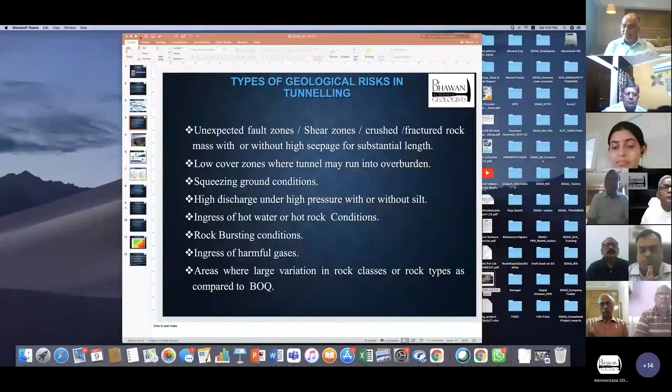He needs no introduction. He is an engineering geologist par excellence and formerly Executive Director NHPC and CMD MECL. Then we have Mr. Sunil Jain with us. He is the Additional General Manager, Rail Vikas Nigam Limited (RVNL), and is currently involved with the development of the Rishikesh Karnaprayag rail link.

We are lucky to have him because his contribution today will be, I think, on TBM bored tunnels. We have with us A.K. Mishra ji, the driving force behind hydropower in Bhutan, who is the MD, Mangde Chu, and we look forward to hearing what is going on in Bhutan, specifically at Mangde Chu.

And of course, last but not least, our stalwart hydropower engineer par excellence, R.N. Mishra ji, who has been the driving force behind UJVN as CMD, and he's a very busy person doing a number of things these days.

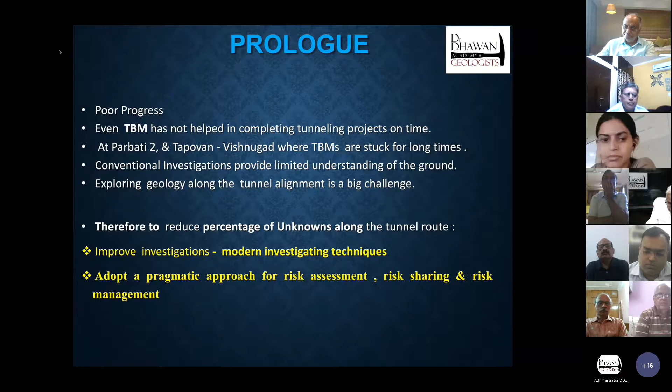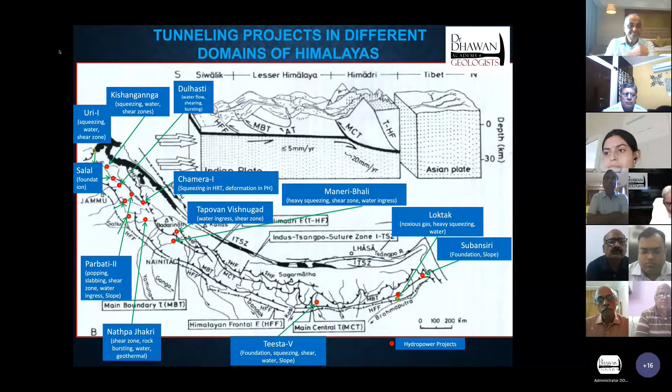So after having done hundreds of kilometers of tunneling, why do we say we are not satisfied with our own progress? The reason is that during construction of these projects, we experienced several types of problems. Some of the main problems we normally encounter are fault zones, shear zones, crushed or fractured rock masses, with or without high seepage over substantial lengths of tunnel, and low cover zones.

I had worked on 2 projects where we received very difficult situations because of that: Devi Ghat in Nepal, Loktak in Manipur, and in the Seva project. Mr. Mishra is here, he was the GM there. Due to low cover reaches, we had our projects really suffering.

Then squeezing ground conditions, we had it at Loktak, high discharge under high pressure with silt was there in Parbati 2. The project was closed for about 5 long years. Then there was ingress of hot waters in Nathpa Jhakri.

Rock bursting conditions, partially we received, we have seen in Parbati 2 ingress of harmful gases. Once again, methane was there in Loktak, and there were a couple of methane blasts, and a lot of people, maybe 100 people, lost their life. This was somewhere in the middle of the 70s.

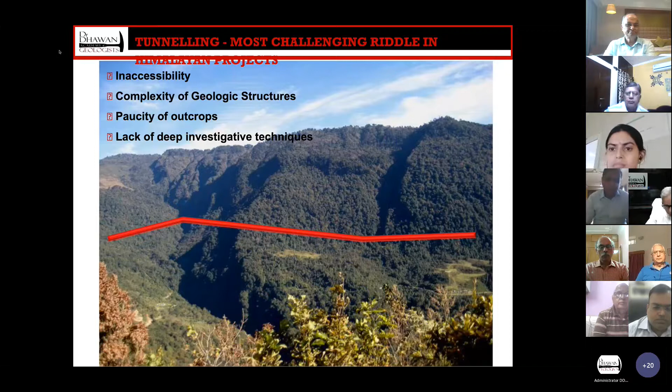So now you can imagine that if you investigate a tunnel in this area, how much geology you can understand with the help of only geological mapping or by making a geological section. So we have to look for the answer that this handicap in understanding geology is removed with the help of other complementary techniques.

And many times for a project like Chamkarchu, we try to develop a geological model. Nowadays the term model is a buzzword. But this is a geological section, you can say a 2-dimensional model. You may take this picture as a hypothetical picture, where based on geological mapping, let me say what we can achieve and then what we cannot achieve.

We now know what are the types of geological formations through which our tunnel will go. And this can be done with a lot of accuracy if the person who has mapped the area has done good work, and he has tried to pick up all kinds of outcrops, although in the Himalayas there are situations where we do not get more than 2% outcrops in the area.

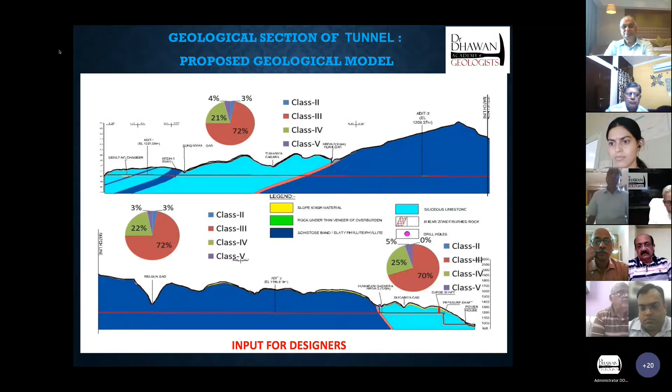And then we also know what are the probable contact zones. We also know some idea about the rock class percentages. But to me, this is a kind of hypothesis which we have to prove or disprove through investigative techniques.

I'm not going into the details of those techniques, but I will simply draw your attention that after doing mapping, we can divide the tunnel into three types of areas. One, where geology is reasonably well known. In my opinion, if the geological mapping is good, you can go up to 1/3 of the tunnel being well known.

Then we have areas where geology is known, but the location of problems is unknown. And the third sector of the tunnel would be where nothing is known. We will be in a dark zone, and we will know some broad geology, outlines of geology, formations of geology, what type of rock types will be there, but neither the locations of problems would be known, nor the extent of geological formations can be understood with clarity.

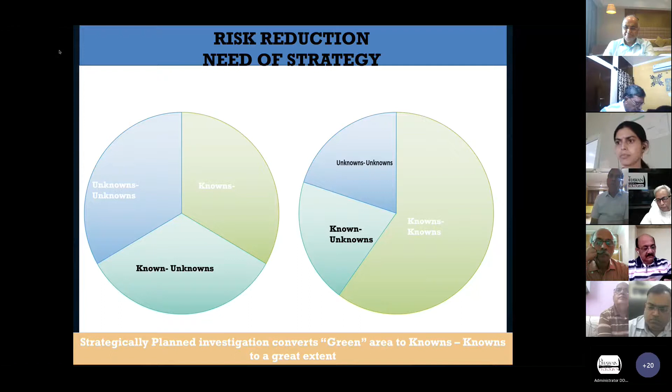So now there's a need for a strategy of risk reduction. If the investigations are done properly, if we can focus on the geological studies for identifying major risks, we should highlight the terrain limitations which have influenced our investigations.

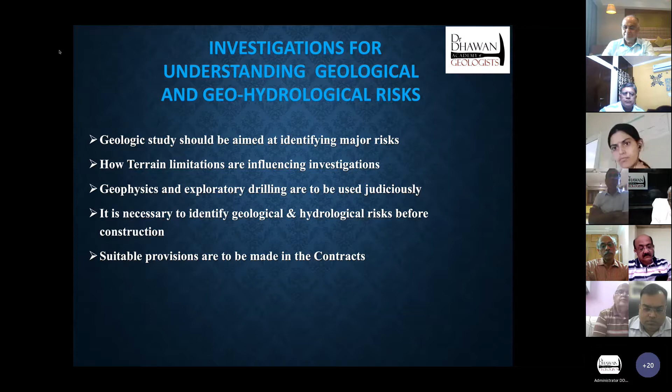We have used geophysics and exploratory drilling with some judiciousness. And if we have identified the geological and hydrological risks before construction, and we have made suitable provisions in the contract, I am sure we will do a better job of identification of risks, their assessment, and then we can draw a management plan.

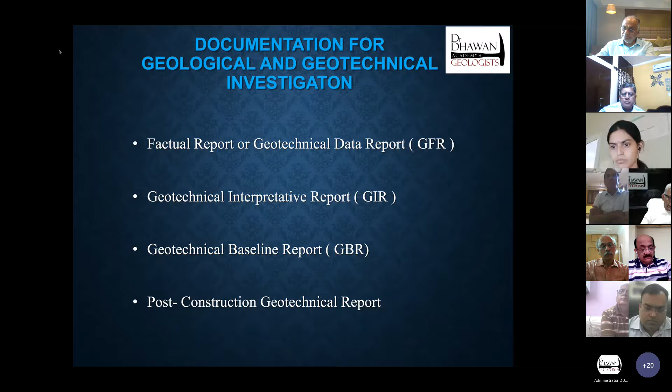So nowadays, previously we were submitting a document known as DPR, but now it is insisted that there should be one volume recording only the factual report of geotechnical data, which is the GFR, so that anybody can interpret your data and is not guided or misguided by your own interpretation. Interpretations are compiled in the second volume, which is the GIR, and then GBR, the Geotechnical Baseline Report.

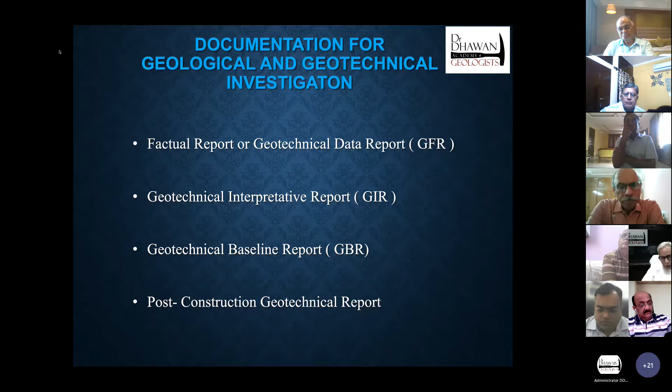In my opinion, this is the report in which all geological and geotechnical risks should be spelled out. But still there will be certain limitations. We will not know the exact locations.

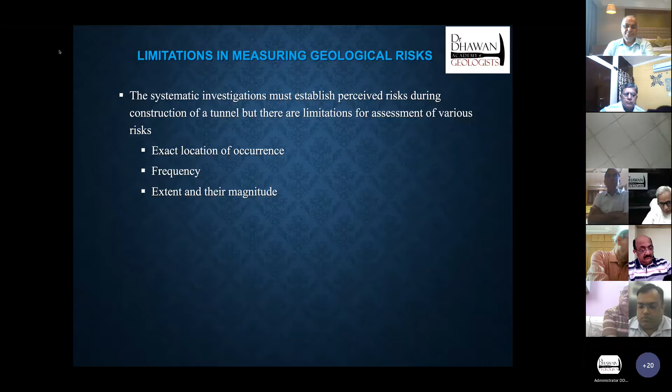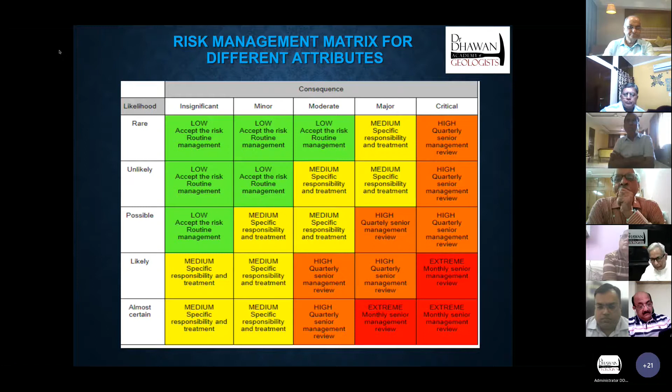We will not know the frequency at which a problem occurs, and we will not know the extent and magnitude in all cases, but in some cases we will. If you have a good set of geological data for each risk, you can prepare a risk matrix depending upon likelihood and consequences into four colors: low, medium, high, and extreme. Finally, record enough geological and geotechnical studies for the GBR, identify each adverse geological occurrence, make a plan for every adverse geological situation, include possible solutions in the contract for tackling each risk, and maintain a risk register. I leave it here.

Here onwards, Mr. Sumit Jain will take over, and he will give you a much better idea about the risk register in his talk. Thank you very much, Deva.

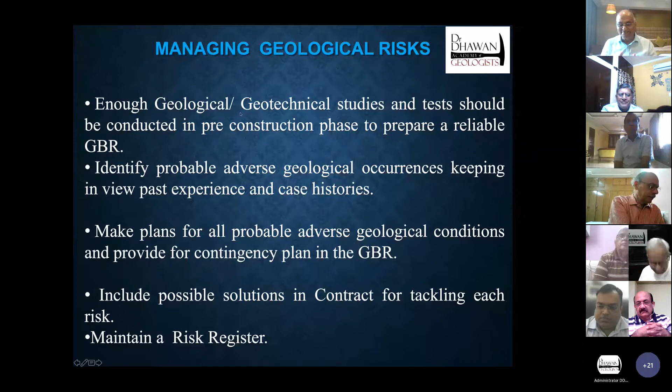Back to you. Thank you, Dhawan Saab. Thank you very much. It was the crispiest presentation we have ever had from you, and very informative too. And now let us welcome Mr. Jain. Jain sir, please.

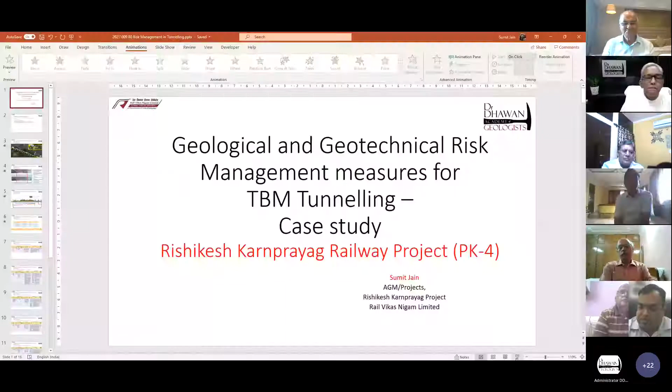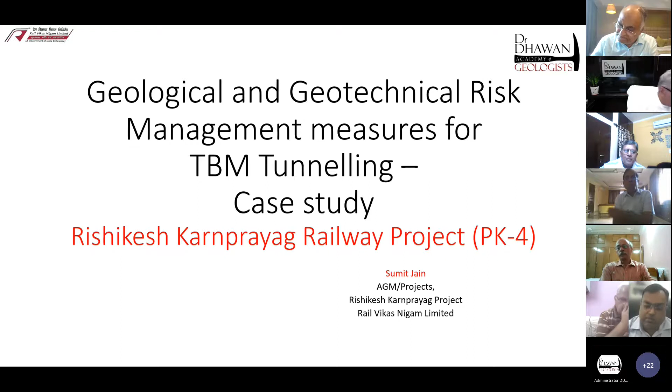Okay, thank you, DDAG, and I feel privileged to be present among you and to present a small aspect on the case study of package 4 in the Rishikesh Karnprayag project. Here we are focusing on the geological and geotechnical risk management which we had adopted in our project. The contents of the presentation will include a brief layout of what package 4 is, so we can get a better understanding.

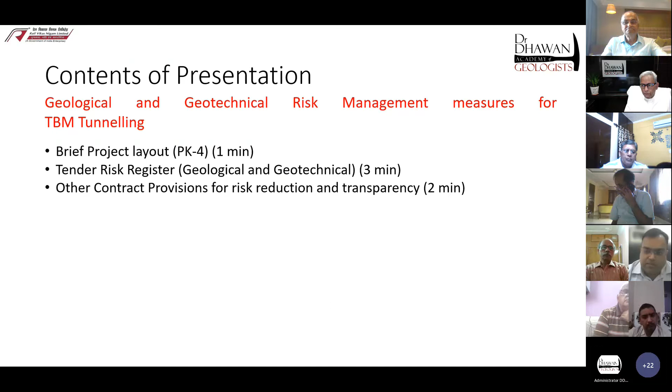Then I will be covering the tender risk register which we have followed in our contract, and within that register we are only going to cover the geological and geotechnical aspects. I'll also cover a few contract provisions kept in the contract for further reducing risk from the TBM operation point of view, and to promote transparency of work. The basics have already been discussed very well by Dr. Dhawan, and I will take it further to cover the risk register of our TBM project.

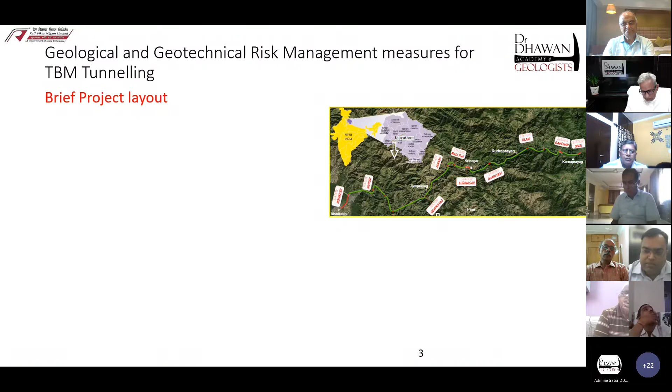So this is a brief layout. On your right, you can see a map of India and Uttarakhand, and the alignment of the project in green. You can see various stations, I feel they are visible. This is the package 4 location, which has been zoomed in, and this is the alignment of the railway project. I'll just go and switch on the marker.

So this is the Devprayag junction, where the confluence of the Bhagirathi and Alaknanda rivers is happening. Towards the right it goes to the Tehri Dam, and towards the Alaknanda it goes all the way up to Badrinath. This is where we are crossing this terrain at Devprayag. This is the Pauri district, and this is the alignment of the project.

This is the portion marked in blue, which we are going to excavate through a TBM. The length is 10.4 kilometers. It is a twin tube project, so we have 2 TBMs, with a 9.1 meter excavation diameter for each. We have a TBM breakthrough point midway inside the tunnel, so the remaining part is drill and blast.

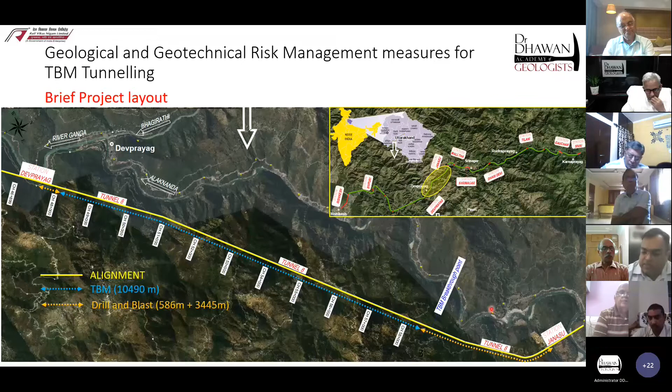So the TBM is going to launch from this location after doing a drill and blast of roughly 586 meters, and then we are going to do TBM tunneling all the way up to this breakthrough point. From the other side, we are going to drill and blast for 3.5 kilometers. We also have a shaft somewhere in between here, which I will discuss.

Now, briefly coming to certain aspects involved with the pre-construction, I would say pre-tender. This was the alignment selection for this particular length of the project. Initially, in the upper part of the presentation, this was the original alignment for package 4, including an underground station approximately 1 kilometer long, with a span ranging around 25 meters wide. This alignment was chosen because the area is entirely composed of phyllites of varying degrees of metamorphism, and we were thinking that if we go deep inside where the overburden is huge, we could face a very heavy squeezing condition.

That is why in yellow you can also see the adits which were located before the design stage. Then when we went to the field and did some geotech investigations, we found that this area is absolutely unfit for making the tunnel. It was primarily because the entire left bank of the Alaknanda River is a landslide-prone area, right from, I would say, if you know the locations here.

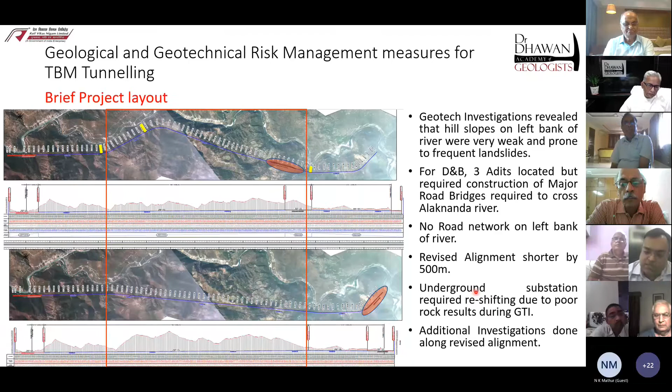So additional investigations were done along the revised alignment. This is the revised alignment in which this is the TBM section. We have a shaft, and this was Chandpur formation, entirely composed of phyllites, and the highest overburden is marked on your screen. We were starting from 544 meters, encountering a maximum overburden of 854 meters, and the minimum was in the range of 137, 70, and these numbers.

These were the initial investigations which we had done. The yellow arrows are spaced quite apart, especially in this zone, because there was absolutely no way to reach this area along the earlier alignment. When we shifted the alignment, we did additional boreholes and extrapolated the data of these boreholes to the new alignment.

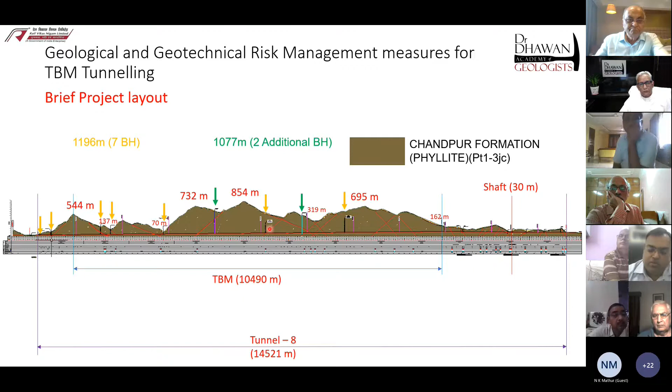The thing we were apprehensive about - that the rock would not be strong and we may encounter higher squeezing because of increased overburden - that was not correct. We got good rock formation in the entire length of this higher overburden area, and the UCS was coming in the range of 45 to 50 MPa. I would not put a single figure because there is a distribution in geotechnical test results. The most frequent UCS was around 45 MPa in this area, and that is when we took a decision to revise the alignment and go inside with higher overburden.

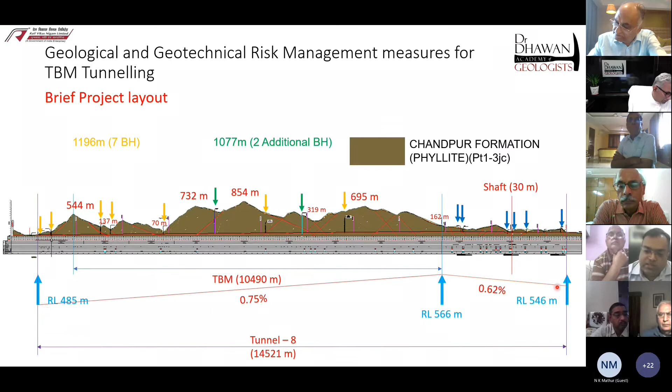Few more strategies to deal with risk for the TBM operation were to have a high point at the TBM breakthrough. So this was the TBM breakthrough area. We had a high point in the tunnel alignment, and any water ingress - although it is phyllite, the joints are watertight, we expect nothing to bother us really - but still for operational and construction reasons, we put a high point at the TBM breakthrough, and all water will come out by gravity flow. This helps reduce the risk of water ingress. On the other side, drill blast also has naturally gravity flow driven drainage.

Now coming to the tender risk register, we have this distribution. We are firstly classifying the likelihood of occurrence with this percentage distribution, then discussing the magnitude of consequence with this marking. Initial risk is high, medium, low, and residual risk is high, medium, low. Each project may have their own strategy to quantify and identify the occurrence parameters and the residual risk magnitude - it's very project specific. It's nothing to do with a standard guideline - yes, there are international guidelines available, but we followed our own set of definitions specific to our project.

This was the column or table headings of the risk register. We were firstly showing the event, which was described, then the impact or consequences, discussing the likelihood and the potential impact if it occurred, and the magnitude of consequence if it occurred.

Then we are discussing the initial risk, that if the occurrence of that event is there, then what is the risk to the project, and what are the mitigation measures required to be taken. Now these measures are both from the employer side and the contractor side, it is not only for the contractor. So here we made a distinction that we have to jointly address the risk mitigation measures.

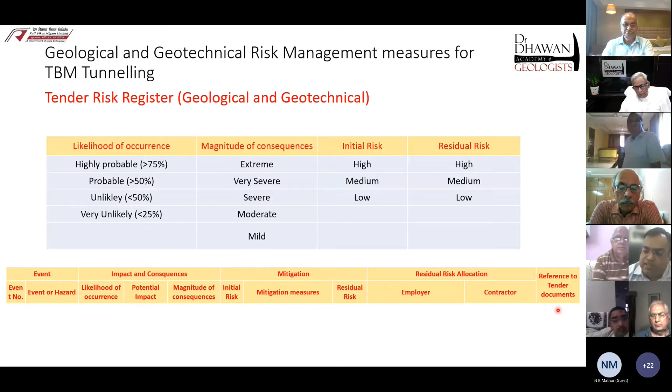And then in the last column, to make it contractually applicable, because in the contract there is a priority of documents, we are mentioning the clauses of general conditions of contract, or GCC if you say, or particular conditions of contract, so that we have an order of priority of these risk management measures.

So this is the very first event which was there in the risk register: variation in distribution of support sections. We are following both drill and blast and TBM. In case of NATM, we are following ONORM, and in ONORM there are various support section types. So we have given a distribution of the support section types along the length of the tunnel.

This is given in the GBR. Now that distribution may vary, because in ONORM usually it depends on a lot of things, not only the ground, but also the way the contractor is installing supports, or the way the grouting is done, and many other factors are affecting it. So we are mentioning that if there is a variation, then it has to be addressed.

And how it has to be addressed? The mitigation measures are like that: the contractor shall commit the progress rate. So supposing there is a B1, B2 or B3 distribution of support section, we have already asked the contractor to commit the progress rates in the contract. If B1 occurs, how much progress rate is he going to give us? If B2 is there, what is the advance rate? So these commitments we are already collecting during the contract when the bid is being submitted.

And this is taken against a standard or rather a detailed design GFC. So another important thing is that the construction drawings, which are normally issued after the award of contract to the contractor, should be very well detailed and included at the tender stage itself, when we are inviting the tender, so that the contractor actually knows what he's going to install, how he's going to manage the work and sequence his operations.

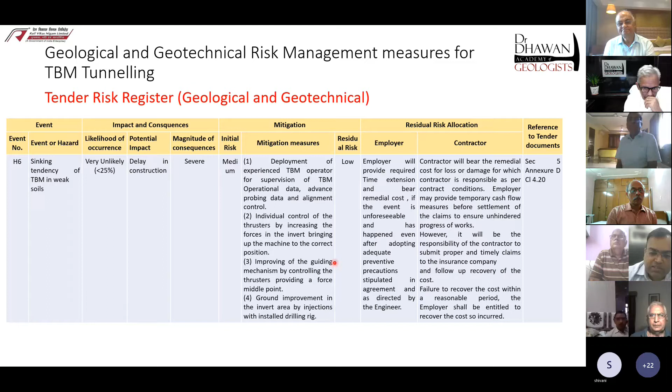The last event is the sinking tendency of the TBM in weak soils. This can be mitigated by deployment of an experienced TBM operator who supervises the operational data, advanced probing data and alignment control, individual control of thrusters by increasing forces in the invert, bringing the machine to the correct position, improving the guiding mechanisms, and ground improvements in the invert area by injection of grouts.

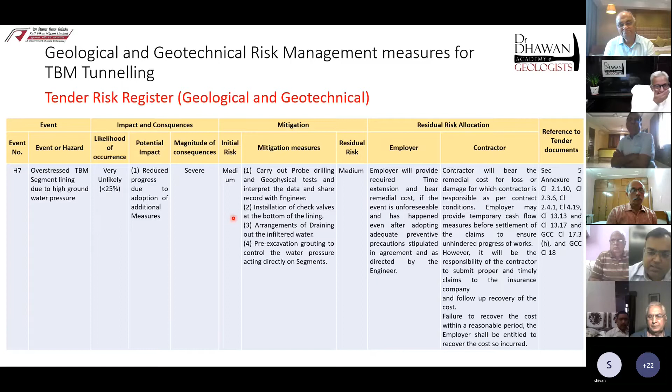Lastly is the overstressed TBM segment lining due to high groundwater pressure. This can be mitigated by carrying out probe drilling and geophysical tests and interpreting the data, installation of check valves at the bottom of the lining, arrangement of draining out infiltered water, and pre-excavation grouting to control the water pressure. So this covers briefly the geological and geotechnical aspects.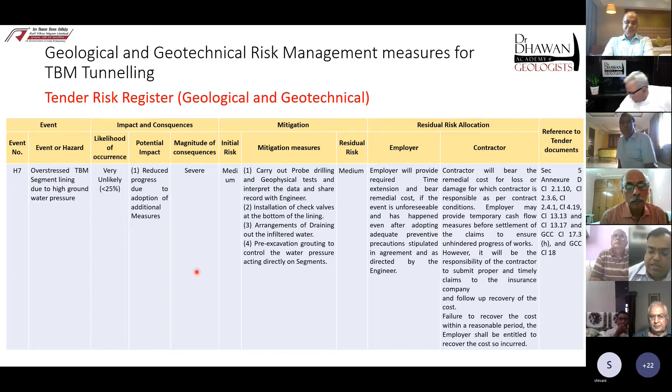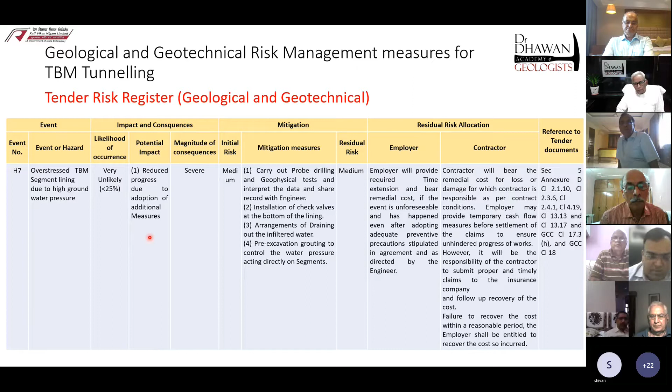In our contract, we have many other categories like TBM design and manufacturing stages, climatic, health, safety, and seismological risk. We also have availability of raw material identified as a risk, working in dumping grounds, transportation logistics, transport of segments, and transporting of the TBM to the site. TBM operation and maintenance is also identified as a risk with many events categorized. Segment casting and installation is a very big area where we have carried out certain risk mitigation measures.

Before going further, I'll cover one more thing regarding the TBM machine - a few contract provisions we have kept, done after a lot of study and review of what has been going on not only in India but around the world. After this I'll close my presentation, but before closing I'll give a brief glimpse of what we have done in the contract.

All boreholes have been investigated, and in situ and lab tests have been shared as GDR, which was covered by Dr. Dhawan. Baseline conditions for bidding were shared as GBR. The contractor has been told he is free to carry out any additional investigation on a payment basis if he feels so, and this has been given in writing, since we are doing this as a partner to the contractor. So tomorrow there should not be any hesitation in doing this investigation - we should not leave this stone unturned.

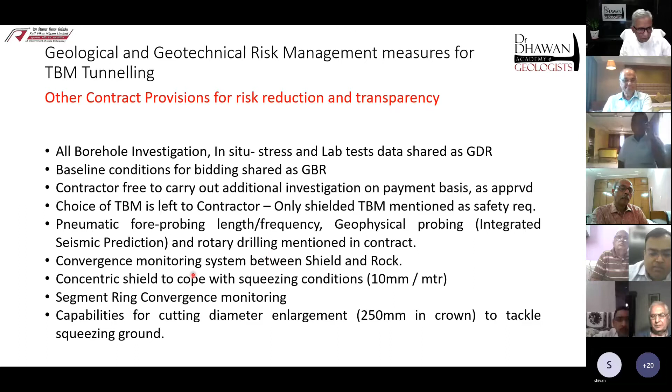Then the choice of TBM we have left to the contractor. We have only mentioned that it will be a shielded TBM because it is a safety requirement of tunneling standards. We have said there will be a pneumatic probing facility in the TBM, mentioned the frequency of probing in the contract, the geophysical probing requirement, the rotary core drilling limited to 1 meter, 2 meter, and the convergence monitoring system between the shield and the rock.

Concentric shields have been specified to cater to squeezing conditions, and the limit of conicity in the shield has been mentioned as 10 mm per meter. Each shield has a front shield, middle shield, and tail shield, so along this total length the conicity will be 10 mm per meter. The shield will actually diametrically reduce from the front shield to the tail shield, because the rock is squeezing towards the shield, so there should be inbuilt margins into the shield to avoid getting trapped.

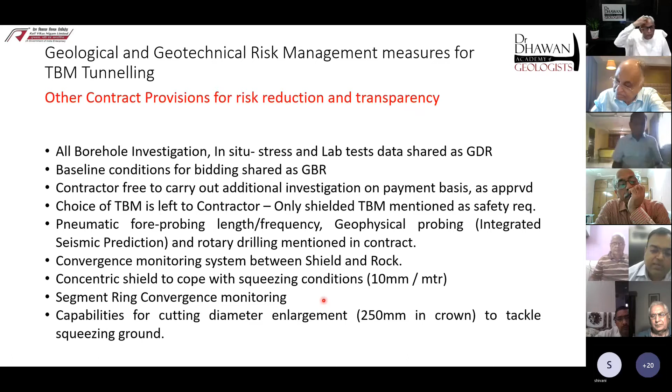Then there will be a segment ring convergence monitoring system through which we will monitor the convergence of the installed segments, and there will be capabilities for cutting diameter enlargement. We have mentioned 250 mm in the crown to tackle squeezing ground conditions. During the design stage we anticipated maximum squeezing of 170 mm, so we have gone slightly more than that as a mechanism in the TBM.

Lastly, the probing and grouting capabilities through 15 inclined and 6 horizontal drill ports, with measure-while-drilling capability on the drill motors for probing - all inside the TBM. We have also asked for 76 mm dia probing capability and a disc cutter load monitoring system. There is a requirement to install 10 mm Hardox abrasion resistant plates on the cutter head, because abrasive rock wears out the plates, cutters, and the front shield. TBM stuck-up and contingency plans have also been identified as part of the contract.

So we have laid out very clearly that in spite of everything, if anything happens to the TBM, there is a stuck-up. The contingency plans have also been elaborated, and the contractor is free to select the type of plan which is agreed by employer and the engineer. And then there is a continuous gas monitoring system installed in the TBM.

So in spite of all the risk mitigation measures, we should always be ready with the latest state of the art when we are going for mega projects like this, where we can install provisions on the TBM which can help us further reduce what remains as residual risk to the project execution.